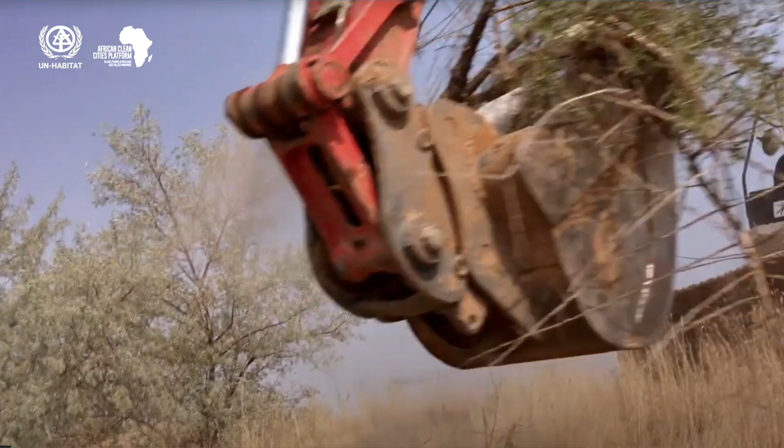This can be put in place on the existing disposal site. Even if the current site is an uncontrolled open dump site, the skills of an operator can and should be proven by enhancing operations on the existing waste mass prior to starting work on any new or improved site. This requires considering not just who the operator is, but how the client, most often the municipality, will be able to set and enforce control level standards.

Identify where the operational revenues will come from. That will enable you to identify who the revenue collector is and who is responsible and accountable for ensuring the operator has the required resources to operate the site to the required standards. We'll go into the details of operations once we look at how to establish a new landfill.

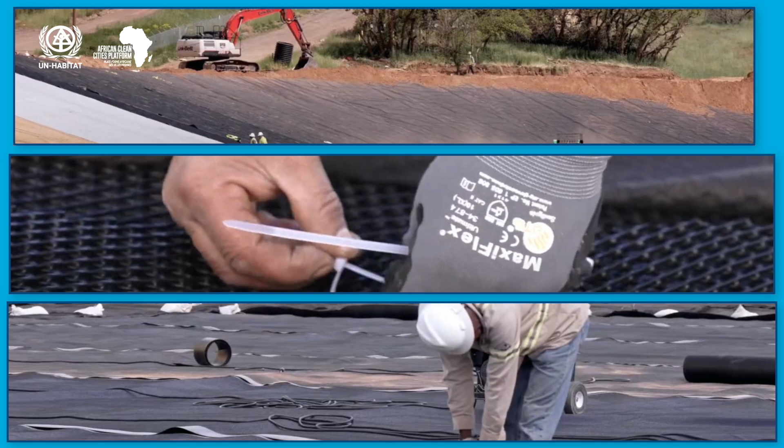Optimizing operations at an existing dump site before transitioning to a new landfill site can significantly enhance long-term sustainable waste management. In many cases, this proactive approach can even eliminate the need for constructing a new site altogether. All too often, the political decision is made to suddenly close a poorly managed dump site and construct a modern sanitary landfill at a new location. However, this approach is often destined to fail.

Instead, the priority must be to build the capacity of operators and regulators so they can manage the existing dump site to at least a basic control standard. It's interesting to note that when this training was being developed, we could find no example of successful sanitary landfill establishment without rehabilitating the existing landfill first, and we did look for one.

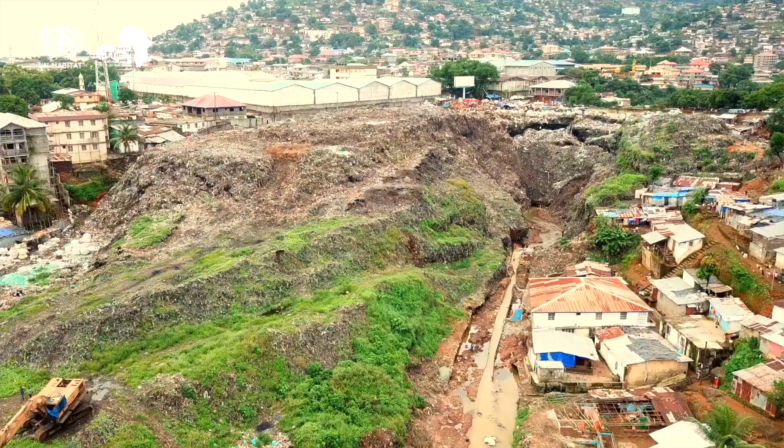So, in cities where landfills already exist, often as non-sanitary open dump sites, it's highly recommended to prioritize rehabilitation and improvements before considering new landfill construction. By upgrading operations and increasing performance standards, cities can save money, reduce environmental impact, and maintain public trust. Improving an existing site often presents fewer financial and social barriers compared to establishing a new landfill.

Developing a new site may spark public opposition due to concerns about the creation of another open dump site. Community members may worry about proximity, pollution, and the risk of repeating past mistakes. And waste pickers who rely on the site for income may fear job loss if operations move to a new, more distant location. A poorly managed transition can increase the risk of illegal dumping, particularly if the new site is inconveniently located or lacks sufficient operational planning.

By focusing on upgrading the current landfill, cities also provide valuable on-the-job experience for operators and field workers. These enhanced skills enable them to manage the site more effectively and sustainably, reducing the likelihood of repeating operational issues elsewhere.

Rehabilitating an existing dump site isn't just a cost-effective approach, it's a step toward creating a cleaner, more resilient future. With careful planning and community engagement, cities can transform their waste management landscape, benefiting both the environment and their residents. As the saying goes, sustainable waste management starts with smart decisions today.

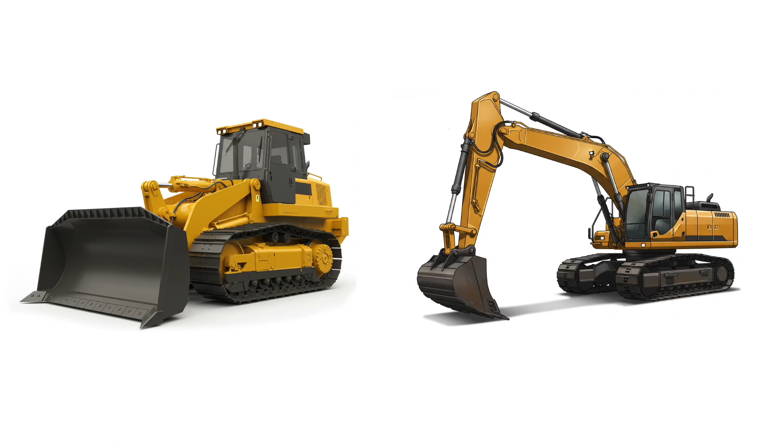Semi-aerobic landfill management can be achieved even without heavy machinery for smaller daily waste loads. However, when daily waste inflows exceed tens of tons, at least one bulldozer and one excavator become essential for proper daily landfill management. Ideally, having one bulldozer and two excavators or two sets of these machines is highly recommended.

The client, revenue collector, and operator must estimate and secure the necessary budget for these machine arrangements. Budget is also needed for procuring sufficient field staff and equipment for key infrastructure, such as leachate collection pipes, gas venting systems, and leachate treatment ponds. Without this commitment, even a semi-aerobic controlled site can quickly become an uncontrolled open dump site.

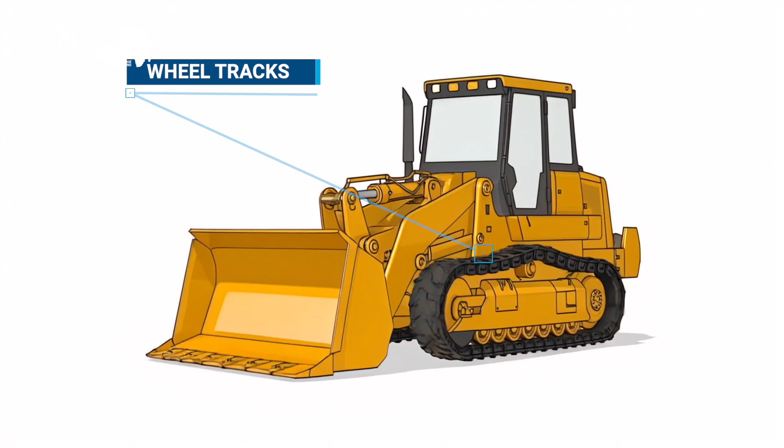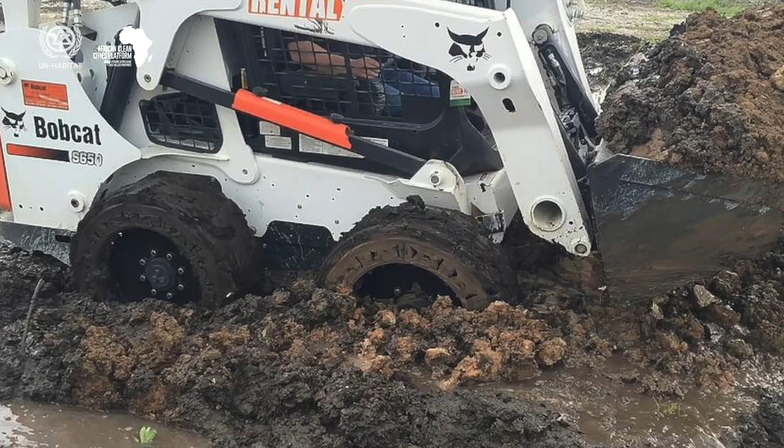It is also crucial to use machines equipped with tracks, as landfills have slippery and unstable surfaces. Machines with standard wheels or tyres are not recommended for site management due to the increased risk of getting stuck, tipping over, and punctures. Planning from the beginning for the long-term maintenance parts, budget, and human resources required for equipment is essential. The working environment of a landfill site is very unique and challenging.

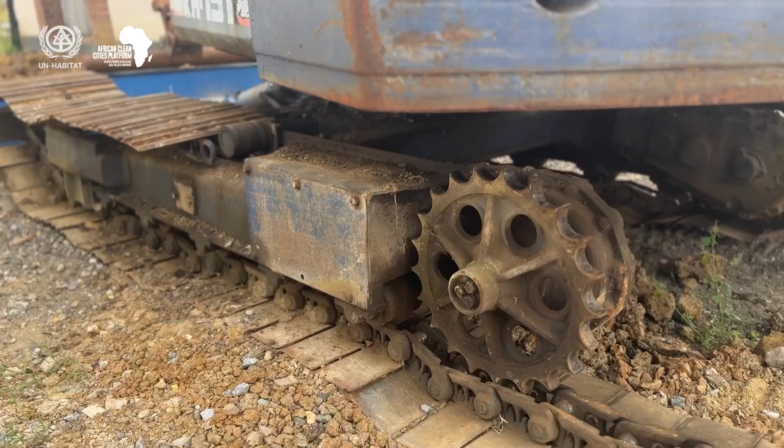Skilled machine operators are essential. Existing staff need to be upskilled, or you'll need to recruit and train new ones. As the landfill working environment is very harsh, heavy machines must be maintained very carefully every day. And keep in mind that spare parts may not be easily available in some local markets. So we must avoid machine damage as much as possible through careful operation and preventative maintenance rather than just reactive maintenance.

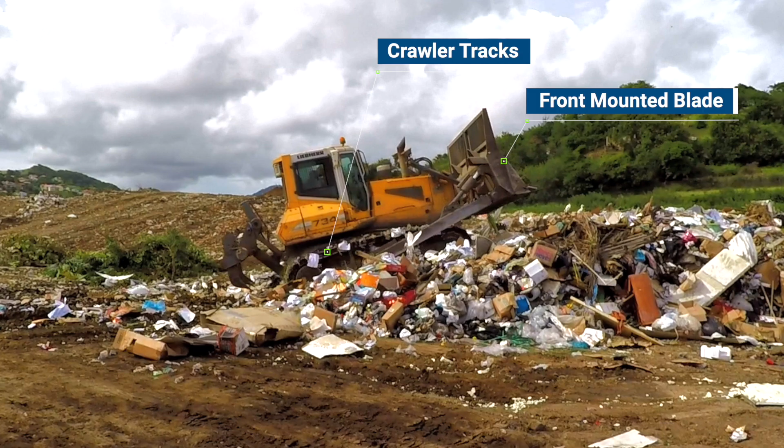The main piece of machinery for daily operations is the bulldozer. It's a key piece of equipment in most landfills due to its ability to level, compact, and cover waste effectively. It's highly suited for waste disposal tasks and cover soil work. The defining characteristics of a bulldozer include its crawler tracks and a front-mounted blade. The blade should ideally be a larger waste handling blade, designed specifically for landfill use, rather than a smaller dirt blade.

Bulldozer sizes are classified by body weight, with models ranging from 4 tons to over 100 tons, depending on the operational requirements and daily waste loads. They must be procured in the appropriate size and number according to the daily incoming waste as per the table shown here. For daily waste amounts exceeding 130 tons, multiple bulldozers are required to maintain efficiency.

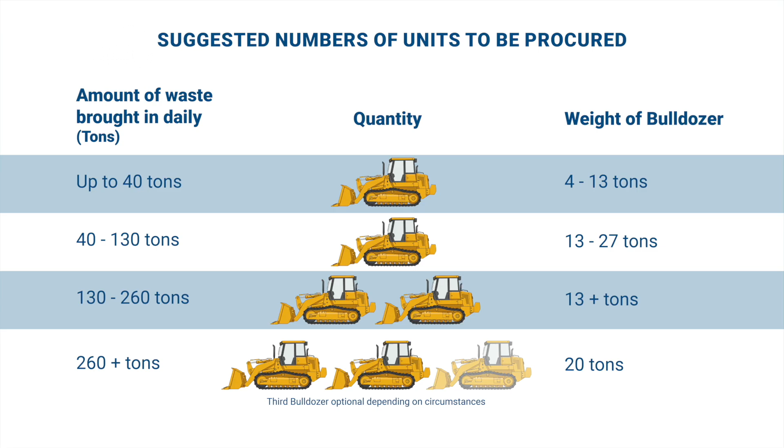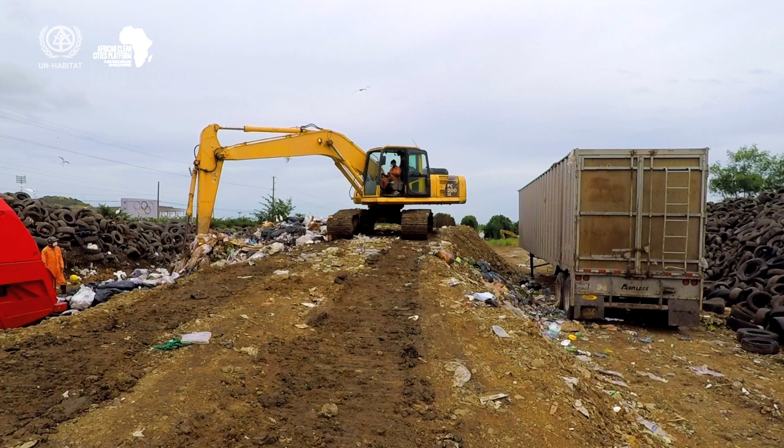Over time, continuous operation of heavy machinery can lead to breakdowns and the need to replace expendable parts. The excavator is a versatile piece of machinery essential for digging up waste and other materials, forming bunds and slopes, loading trucks, and transporting materials over short distances.

Excavators are typically mounted on crawler tracks, allowing them to operate effectively on weak and unstable ground.

The water truck plays an important role in site management, where water resources are available, by controlling dust levels and providing water for sanitation purposes, such as hand washing stations and shower areas for workers. Wherever possible, even when not in active use, the truck should be kept filled with water to assist with initial firefighting should the need arise. A water truck on standby can be a critical tool for quick response in preventing fire from spreading.

It's essential in all waste management operations, but particularly landfill operations, that specific entities and persons are assigned to conduct all tasks and responsibilities, so they can be held accountable for delivering the required standard of implementation. It is therefore important to make clear the institutional structure of the landfill management. In other words, who will take what actions for each specific aspect of daily landfill management.

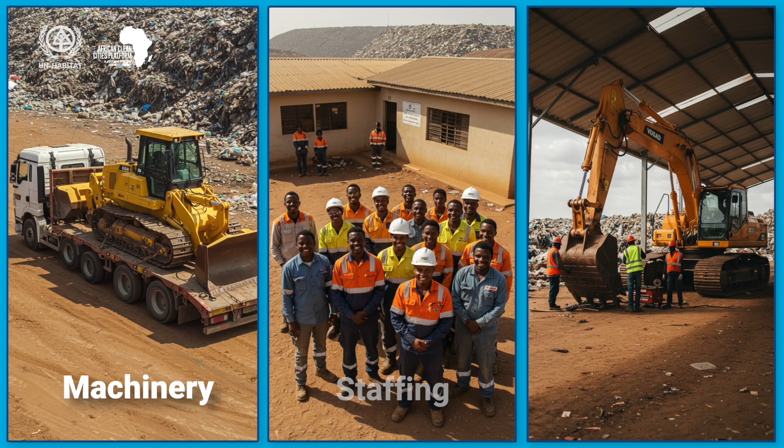Within this context, and as introduced at the beginning of this module, to ensure sustainable landfill management, the client, often the city or municipality, must secure funds, machinery, staff and materials. At least one bulldozer and 1 or 2 excavators must always be available on site, regardless of whether the landfill is aerobic, semi-aerobic or anaerobic. The client must estimate annual costs for machinery, staffing and maintenance, while also preparing for post-closure requirements. Semi-aerobic landfills require maintenance for 20 to 30 years, and anaerobic landfills may need even longer.

Field staff must be present 24 hours a day to monitor and record incoming waste, mitigate illegal dumping and burning, and track waste collection vehicles. Their role ensures operational accountability and safety. The management entity must also procure materials for vertical extensions of gas venting systems and monitoring equipment for leachate and gas levels. Estimating the full requirements for landfill management tailored to the city's needs is vital.

A strong and ongoing commitment to securing funds, machines, staff, and infrastructure is essential. Controlled landfill operations should only begin when all these resources are secured, ensuring a solid foundation for sustainable waste management. The risk, if this is not secured, is that equipment rapidly falls into disrepair due to the simplest mechanical breakdown, and the landfill site quickly becomes an uncontrolled dump site that cannot be recovered to a controlled landfill level.

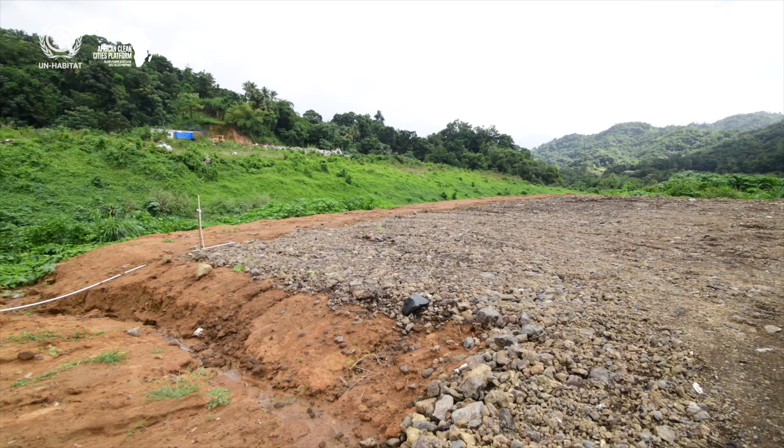Clear, uninhibited access to the landfill by all types of vehicles that might transport waste to the site, including everything from hand carts to semi-articulated trucks, is essential. For this, well-constructed and maintained all-weather access and on-site roads are required, which includes appropriate continuous operational budgeting and technical implementation. Access roads need to be constructed to have a structure higher than the rain and leachate running ground, as illustrated in this diagram. This will prevent the road from becoming submerged in water by rains and allow waste collection vehicles to easily travel even during rainy season.

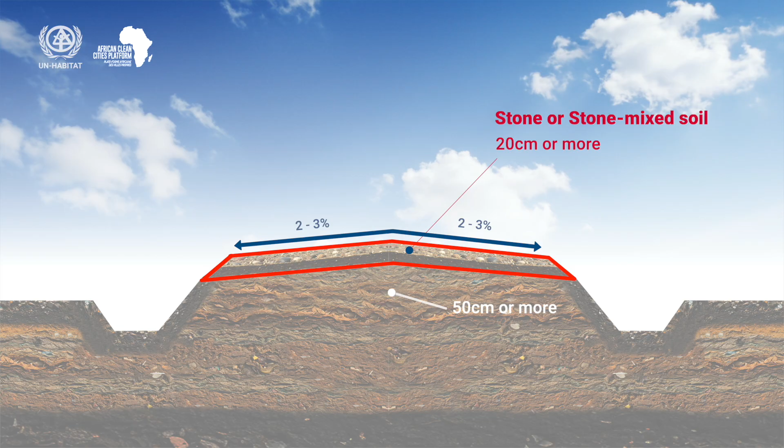It is recommended to build the access road by banking old waste, which was landfilled 3 or more years ago. The reason for using old waste is that it will, to some degree, have decomposed to soil, is relatively easy to spread and compact, and is more suitable for road construction compared to newer waste. After raising the road 50 centimetres or so using old waste, compact it thoroughly with heavy machinery. Vehicle tyre punctures can be avoided by spreading crusher-run stone or stone-mixed soil to a 20 centimetre thickness to finish the road surface. Rainwater can be removed more swiftly by giving a cross slope to the road and digging unlined side ditches on both sides of the road.

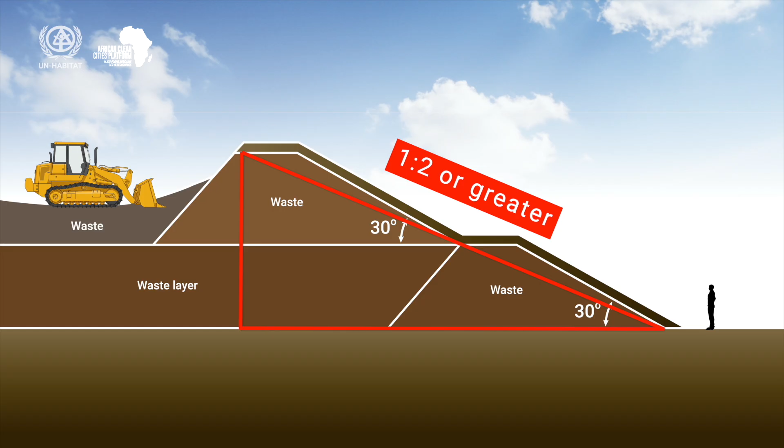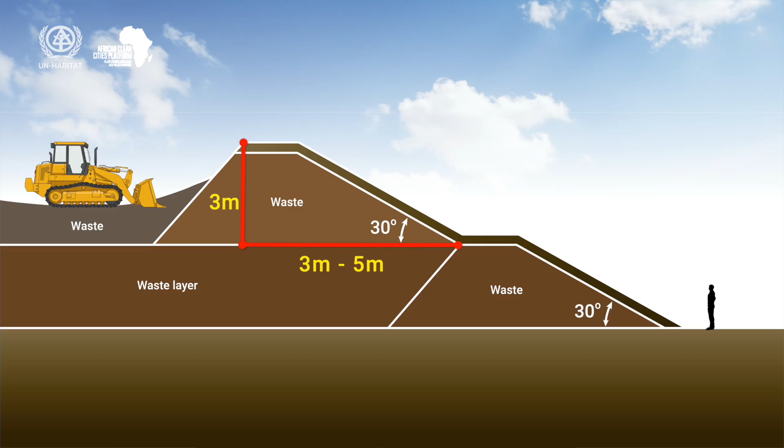Also, to reiterate early guidance, embankments can be essential as a landfill structure that make it possible for the landfill to optimise available airspace. When building embankments, the site's bulldozer and excavator can be utilised. Remember that an overall slope gradient of around 1 to 2 must be achieved by giving each slope a gradient of 1 to 1.5 and building 3 metre high steps at 3 to 5 metre intervals. This will allow more waste to be piled up while forming more stable slopes with good compaction. It will result in a greater landfillable amount for the entire landfill site.

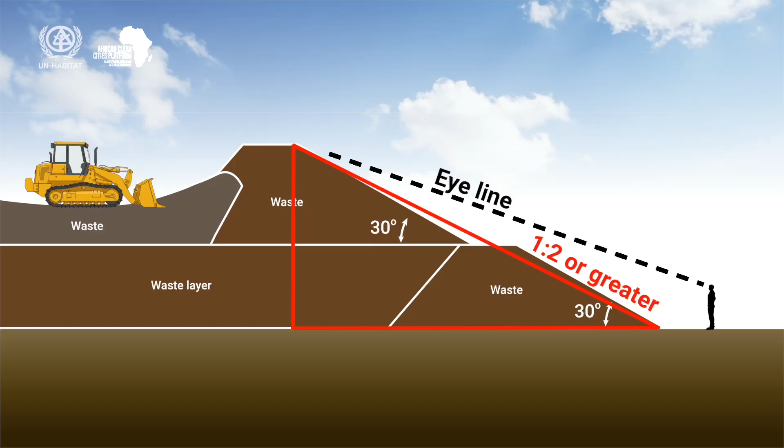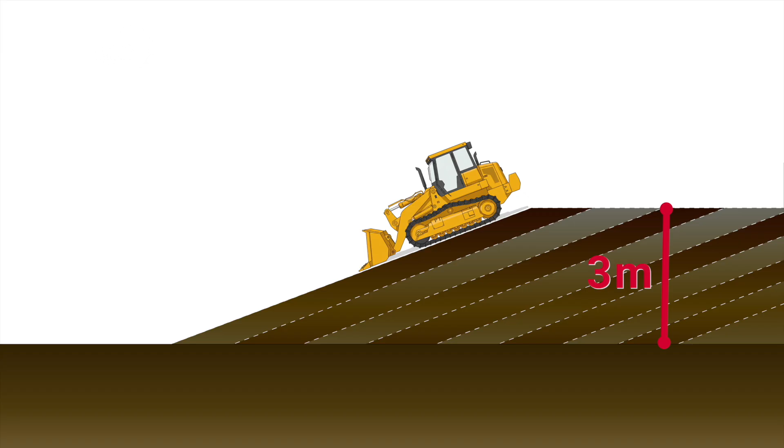Bulldozers conduct waste compaction by their own weight and by pushing waste. The machine should go back and forth at least 5 times on the same area to compress waste sufficiently. And compacted waste must be arranged so that waste sloped layers are accumulated. The thickness of each layer must be around 3 meters. There are 2 ways to compact waste, namely the push-down method or the push-up method, as shown.

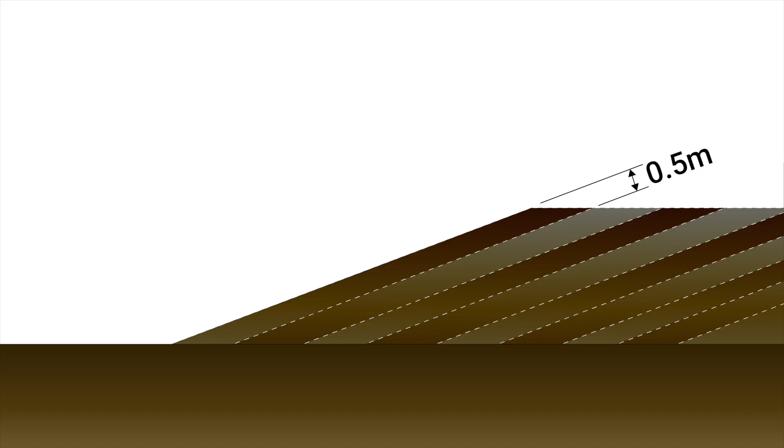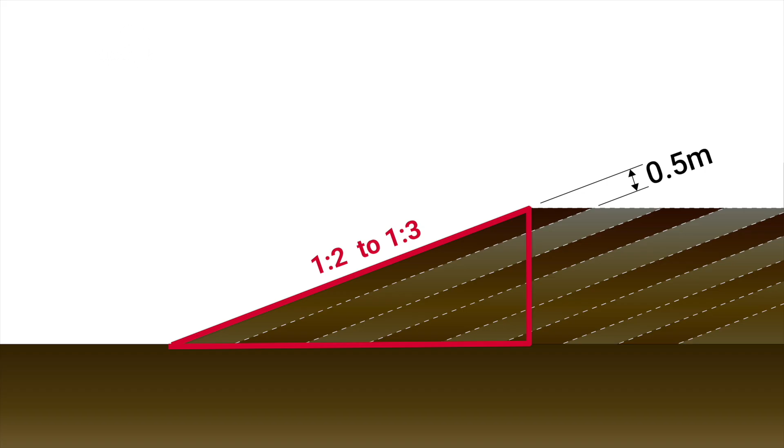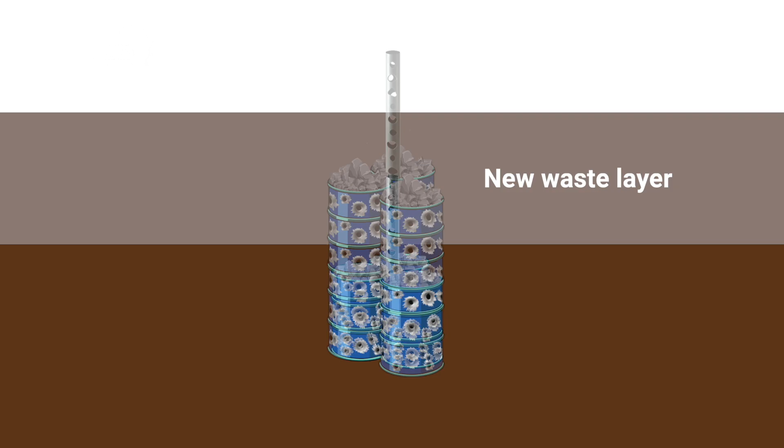Spread about 50 centimeters of waste on the slope that has a gradient of 1 to 2 or 3. Once the landfill ground is fully covered with this compacted waste with a height of 3 meters, a new 3 meter waste layer must be added on top of the first layer. Please keep in mind that gas venting systems need to be extended vertically upward.

Without proper site instruction, there is often a risk of collisions between waste pickers and waste collection vehicles, or between waste pickers and site heavy machines, such as bulldozers and excavators. We receive many reports about critical injuries or even deaths of site workers due to these types of collisions. Yet they are easily avoided. Staff in charge of landfill management must make efforts to avoid these fatal collisions as much as possible.

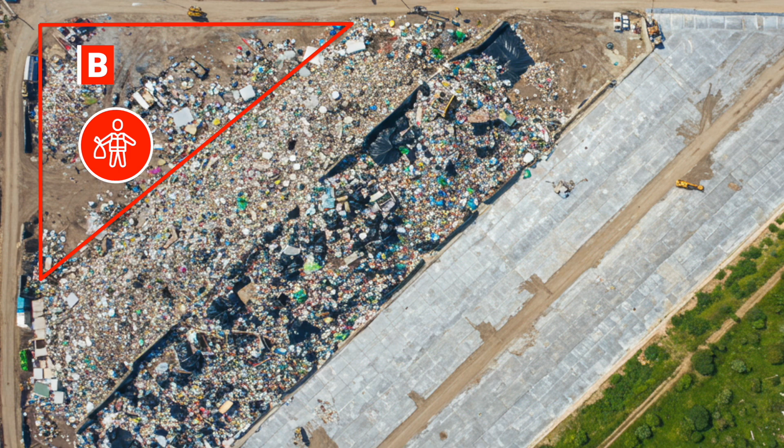One recommendation is to separate machine works and waste pickers' work. For example, one day waste pickers can collect valuable waste at section B when new daily waste is dumped there. At the same time, in section A, heavy machines like bulldozers and excavators can work to spread waste and conduct necessary waste compaction. On the next day, heavy machinery can work at section B for waste spreading and compaction, while waste pickers can collect valuables from newly dumped waste at section A.

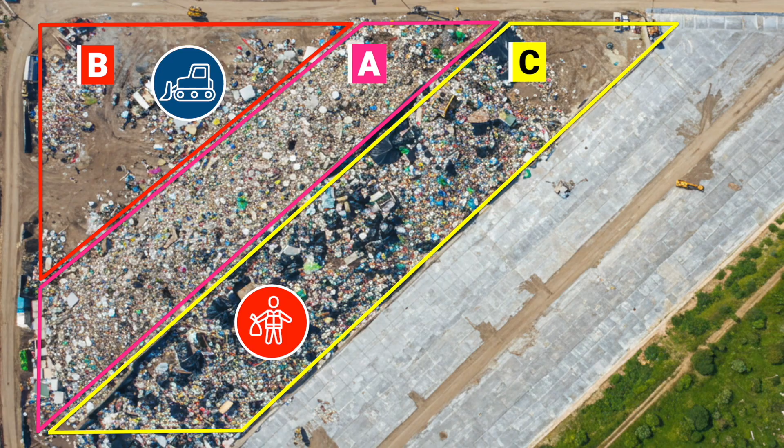If waste pickers can wait for 1 day for waste collection vehicles to unload daily waste completely, you can avoid a collision risk between waste collection vehicles and waste pickers. But do keep in mind that this arrangement can be difficult to implement. Waste pickers tend to want to collect valuables from waste collection vehicles as soon as they arrive. So some discussion with them will be necessary to arrive at a solution that suits all.

Fires require oxygen, fuel, and heat to burn. Landfills contain a lot of fuel, such as plastics, wood, and other combustible materials. Sparks from electrical equipment, waste pickers burning plastic insulation from electrical cables, machinery operations, and hot ashes in fresh waste can all ignite fires. In anaerobic conditions, landfill waste can generate gases such as methane. When fires start in such landfills, they can result in explosive events, suspend operations, and release harmful smoke into nearby areas. Immediate action is therefore critical when a fire starts.

Fire extinguishers should be strategically placed on operational equipment for quick access. Surface fires can be relatively straightforward to extinguish using water or pushed cover soil. In deep fires, shutting down the methane supply is essential. Methane buildup can fuel and spread fires, making the situation more dangerous. Care must be taken as methane concentrations between 5% and 15% in the air can lead to explosions if mishandled.

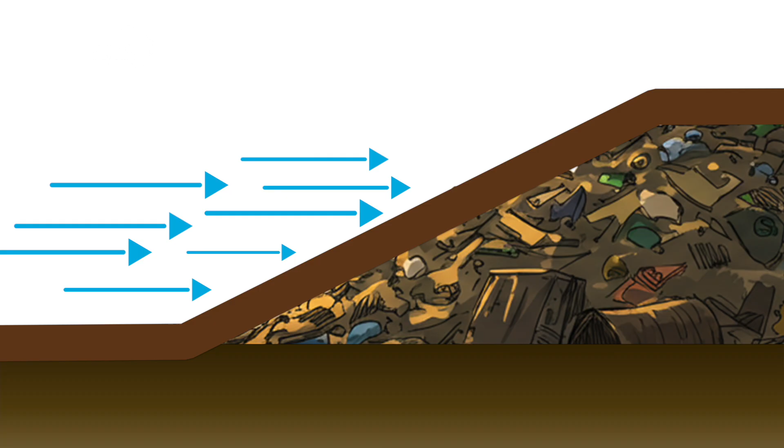Fires forming and continuously burning in uncontrolled side slopes of landfills are common due to the wind entering fissures in the slope and feeding the fire oxygen. This highlights the requirement for strong earth-covered embankment slopes around the perimeter of the site that are continuously maintained and raised with the waste height to create a protective barrier to slope destabilization and fire establishment.

It's now time to start thinking about how you can begin to put the lessons learned to use in your city. So discuss with your colleagues whether the introduction of controlled landfilling is needed and possible in your city. And if it is, start estimating how much the city needs for sustainable operation of their landfill and how the city can secure the funds, staff, machines and materials. Make clear which controlled landfilling method your city can introduce, the anaerobic method or the semi-aerobic method. And remember to check and apply your local context and point out reasons why the selected method is the most suitable in your city.